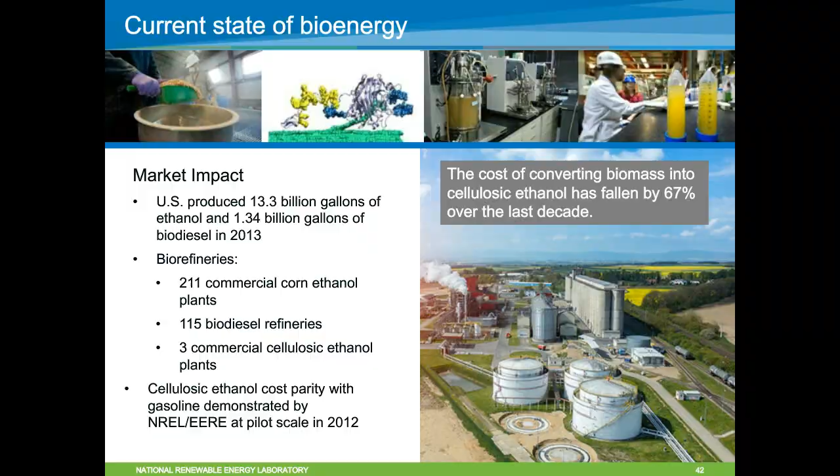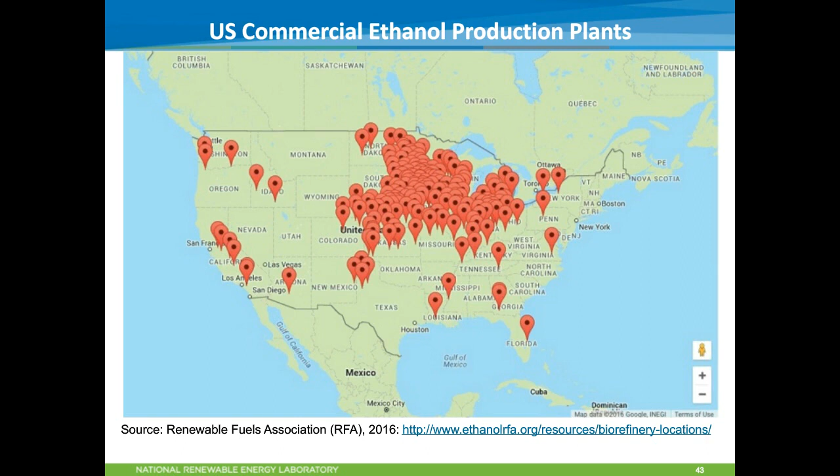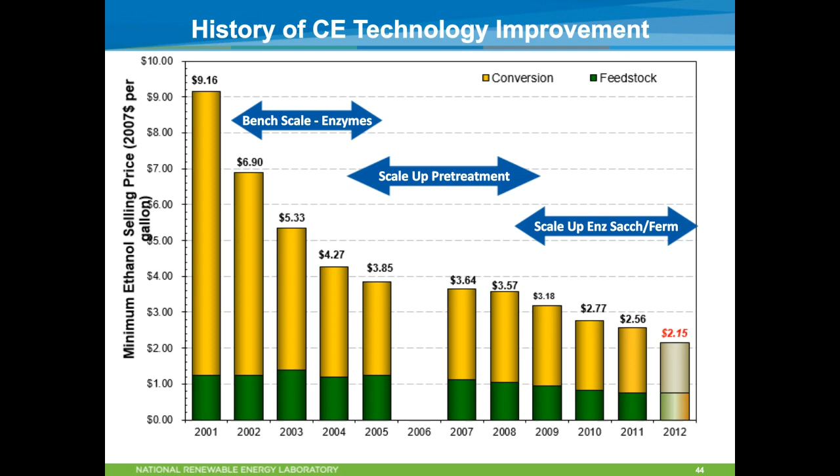And the work we're doing, and I'll cover in the rest of the presentation, is how to kind of break this logjam, how to move cellulosic ethanol and biofuels into a point where they're actually competitive with crude oil as low as $50 a barrel, and also new types of approaches where we can make better fuels that actually advantage higher efficiency, lower polluting engines.

So we were part of a UN study in 2013 that really looked at what the future of bioenergy should be, what should be the right role of bioenergy. And this UN study really determined that the best role of bioenergy worldwide, in North America and the United States, is it should be about 10 to 30% of the fuel supply.

And if it's incorporated in a logical, systematic manner, it can have all sorts of positive impacts: resilience in food supply, decreased pollution, actually enhanced agricultural production, and others. Also, switchgrass and other types of energy crops can actually be used to rehabilitate degraded lands. So that's the path that we're going forward, and I'll explain roughly where we are now.

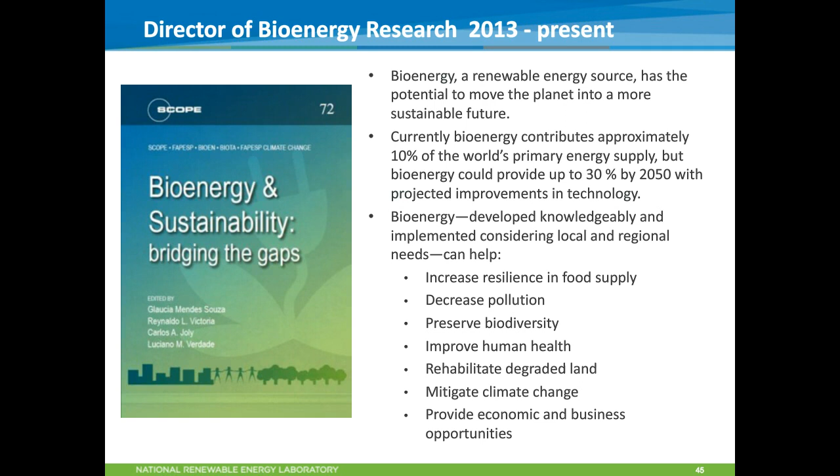So like I mentioned, crude oil prices are very low. Nobody really has the ability, obviously, to predict the future. All sorts of events can happen that drive up crude oil prices, geopolitical events, etc., and those are quite unpredictable. But what is predictable is supply and demand.

So crude oil demand has actually been decreasing in the United States since about 2005, especially gasoline. Demand is decreasing about a percentage point per year. That varies as a function of the economy and other factors. But if you look at it over the macro term, it's been decreasing about 0.8% per year, driven largely by vehicle efficiency and decreased miles driven in the United States, predominantly by the younger population. So what we're facing is a situation of where do we go with biofuels in this kind of price environment.

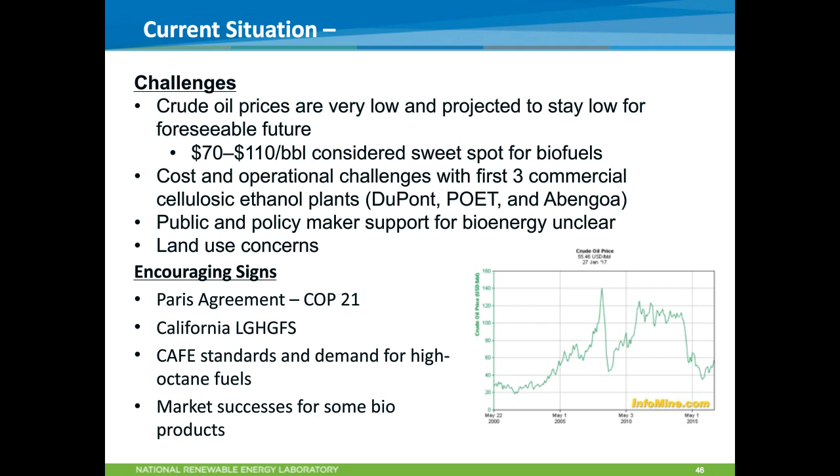So like I mentioned, we're looking at the best opportunity worldwide and in the United States, and it's not cropland, it's pasture land, which tends to be a generic term for land that has lower productivity. It tends to be semi-arid land, land not suitable for crops.

And then also we're looking at energy crops on land that can be used in a dual cropping manner, where, for instance, if you're in the Midwest, you would grow a winter bioenergy crop that would be a nitrogen fixer to enhance the fertilizing value, decrease fertilizer use, and enhance food production and have no net negative effect whatsoever on food or land available for crop production.

And then, like I was mentioning earlier, if you factor all those considerations into context, you can show a situation where biofuels can be used to produce 20 to 30% of the fuel supply.

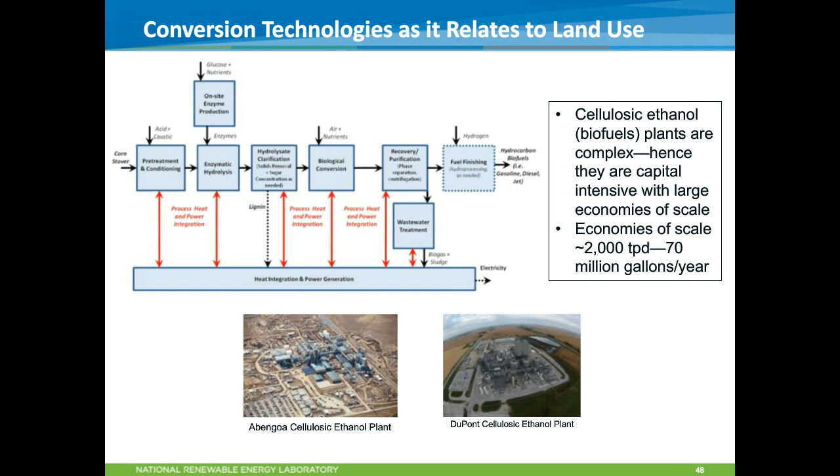So the next couple of charts, I'm going to show you the approach that we're taking. So this just shows that flow chart that I was showing you earlier in a more simplified schematic manner.

So roughly the process is you pre-treat, condition the biomass, you do hydrolysis, which is an enzymatic process where you convert the biomass down into simple sugars. You clarify that, you do a co-fermentation, wastewater treatment, and then the lignin, which is a third of the biomass, is burned to produce power.

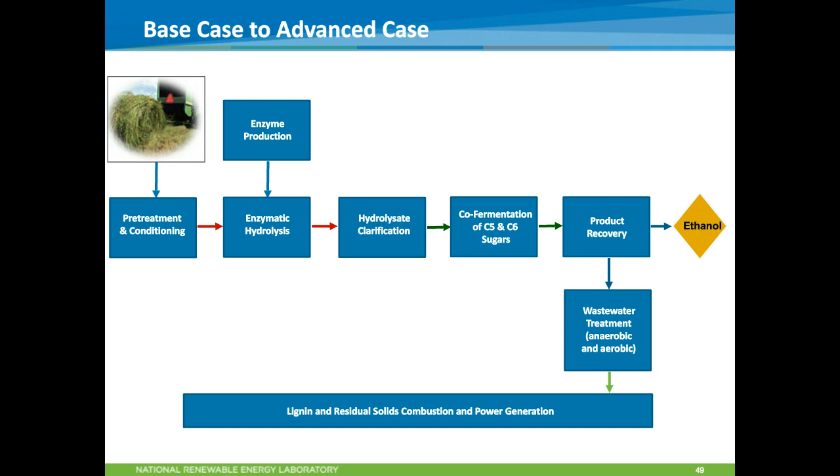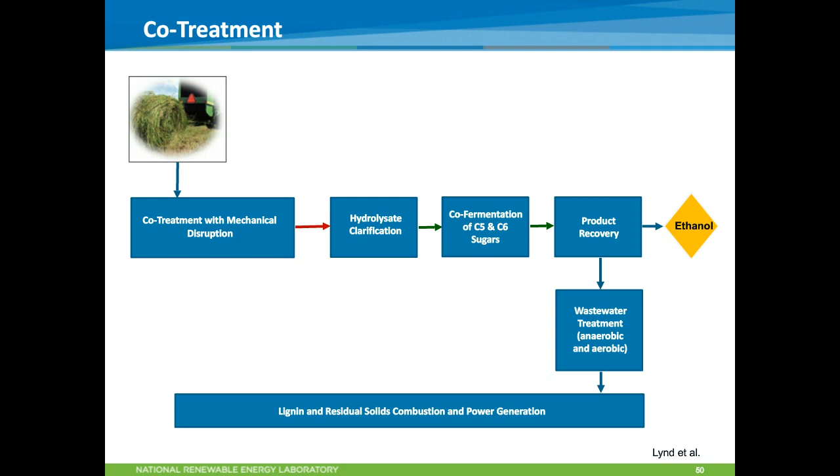So through advanced biology and the research we're doing here at NREL, you can see how we're greatly simplifying this. The first step is to combine the two steps of biomass hydrolysis and treatment. That has a fairly significant reduction on cost, almost 15%. And then through better biology, and the R&D on this is showing good progress, you can combine four steps into one step. So now you have a 6-step process that is 3 steps.

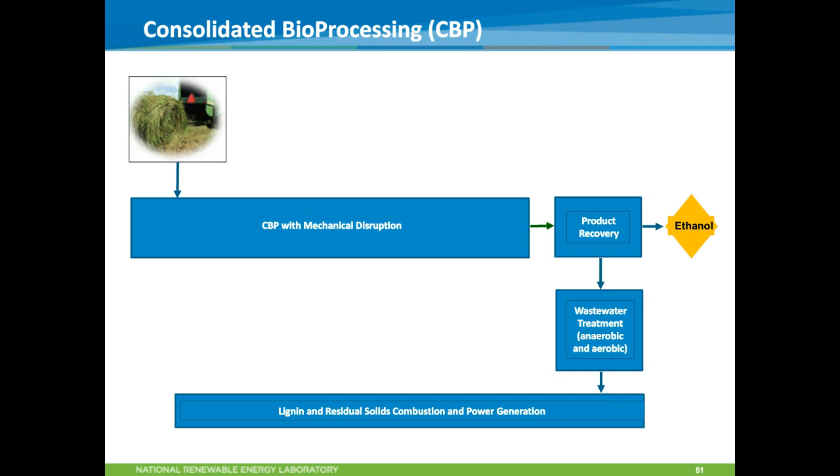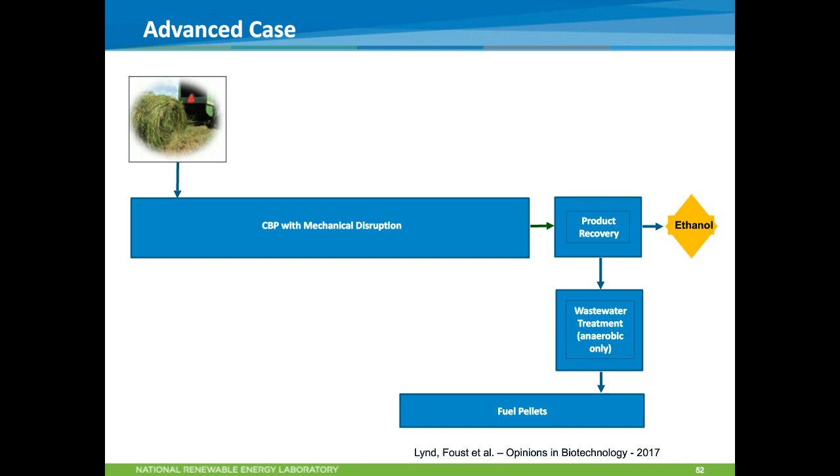So it opens up the business space for smaller companies, less capital intensive, less research intensive. So those are all good benefits, but probably one of the most important things is it does reduce the food versus fuel concern, so that's nice as well.

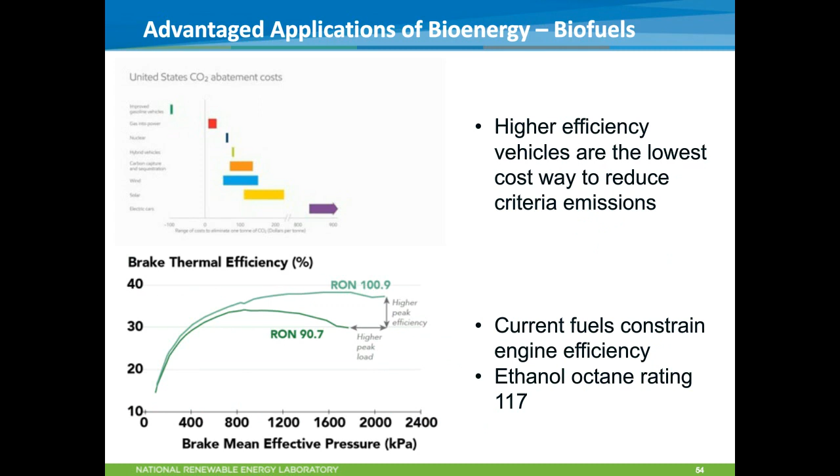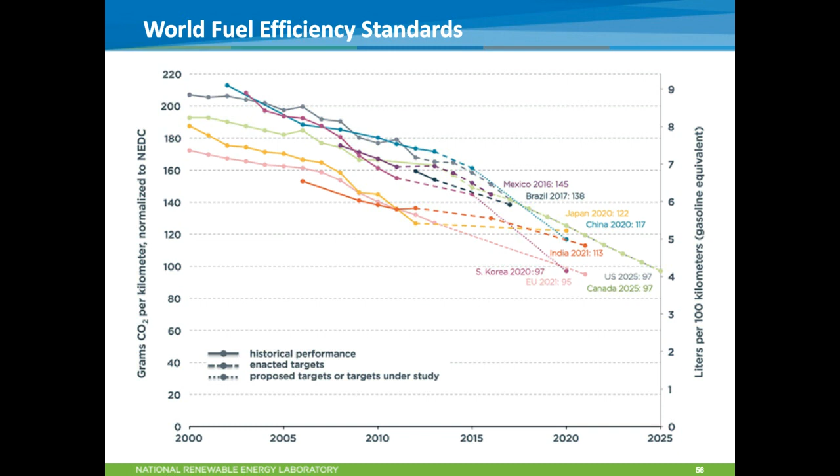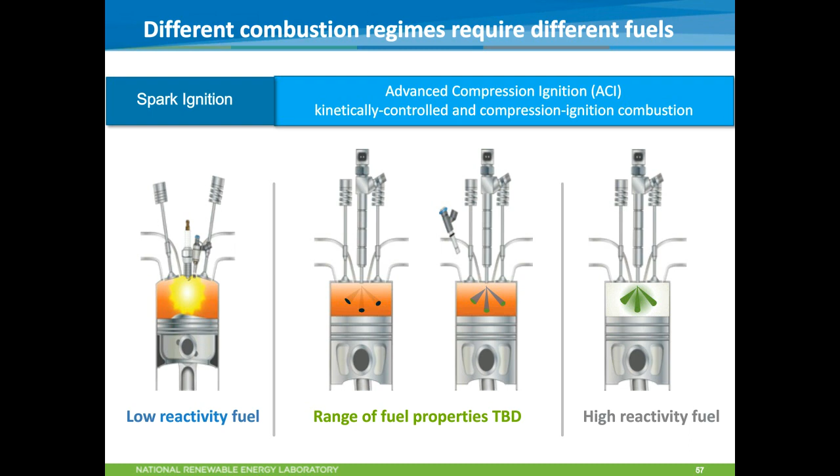This shows the advantages for using the oxygenate, both in spark ignition gasoline engines as well as compression ignition diesel engines. And then finally, one of the big advantages of biomass is if you look at crude oil refining, it's the 85-15% rule. 85% of the volume of the crude oil goes to fuels, but 15% goes to chemicals, but that's 50% of the value. So in order to make biofuels competitive, you have to make higher value chemicals.

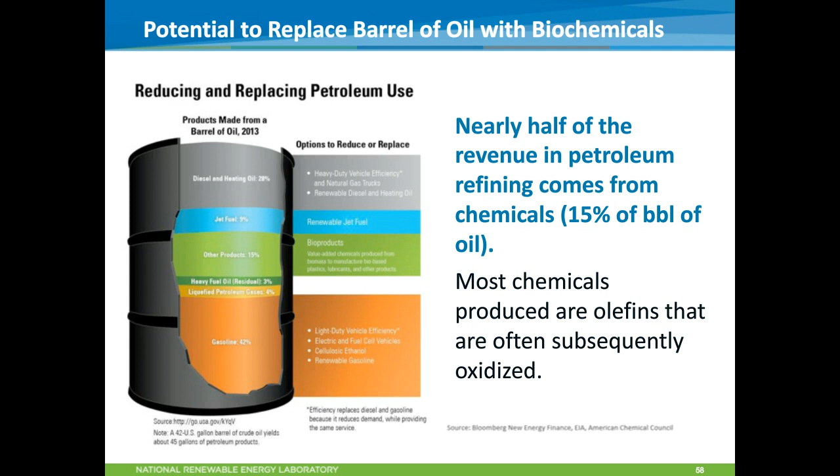And this is a real inherent advantage of biomass because the oxygenated functionality in biomass can make better products, better chemicals, and really enable whole new performance-based products like rain-resistant jackets, better tires that have a better temperature range, so you wouldn't have to be changing out winter and summer tires, more flexible snowboards, skis, etc. So this is an area that we're really advancing on.

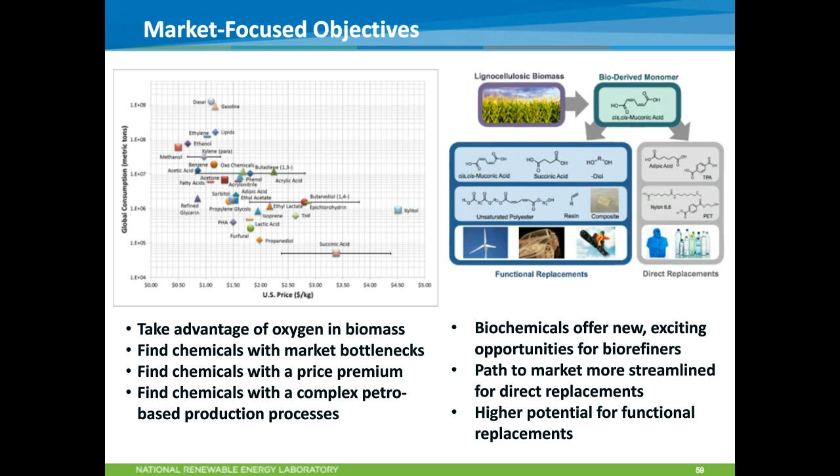So that's really what we see the future is: better fuels for higher efficiency engines, lower emitting engines, as well as better chemicals. So with that, I'll end my presentation, and I think next we're going to Peter Sikowski, who's going to give you a specific example.